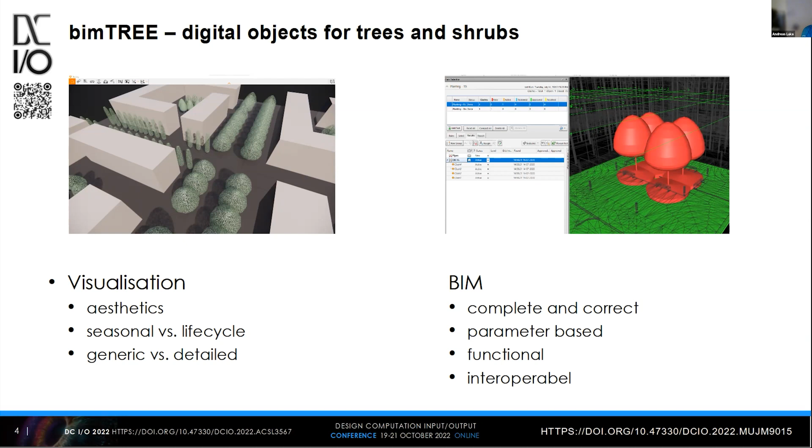And the trees are based on two general ideas that we put together. One is an asymmetric hull model developed by Cescatti for forest science, for measuring light in forest environments. With this kind of model he can represent, with only 8 parameters, 6 points and 2 form parameters, a huge variety of crown forms with a very small memory footprint, which makes it possible to have thousands of trees in one model.

And we could show that we could adapt this same model to roots. And the second one is finding formulas or models that can describe the growth of a tree or other plants over a whole life cycle. Many equations are very limited in their boundaries of when they are valid, like in the middle where we have this nice almost linear growth, but at the beginning and at the end, the growth is very different.

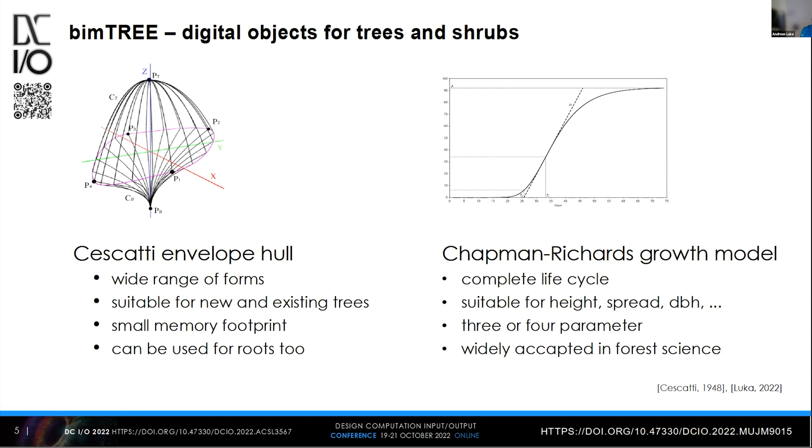And this model is also suitable for many different parameters of a tree. So we can simulate the development of diameter at breast height, of height, of spread of the tree, but also the height of the largest crown radius, all that is needed to describe a tree properly. And it's also very widely used in forest science for forest measurements and yield tables. So we have a lot of comparable data and good knowledge of how to solve this as a regression; it's a non-linear robust regression model that we use to find these growth parameters.

So we try to describe this tree with parameters that can also be compared to real existing trees. And we mostly do this in a very simple graphical way, drawing splines around the trees, and then we translate these splines into super ellipses because they are much more efficient to store and to manipulate than splines. And as we mentioned before, we fit the growth curve mostly with R, robust nonlinear regression, but it could be done in Python.

A couple of packages are available, and we're using a special reparameterization of these formulas. We have a very small, simple one for writing our code, and we have a reparameterization that is more comparable with data that we know from tree nurseries, like the point of strongest growth, that's the inflection point of the curve, or the maximum height of a tree, that's the asymptote of the curve, and so on. We have a special paper on this, and I also have a bigger blog on this topic on my website.

But you also have to see that these are empirical models. So often the best fitting curve is not the right curve. We found that sometimes curves don't start at the right point; diameter at breast height can't start at 0 because you only have breast height after 4 or 5 years of a tree. So a model that fits to 0 isn't correct. That's a problem we face with all empirical models, and people working in digital twins, where we go to lower order models, face actually the same problems.

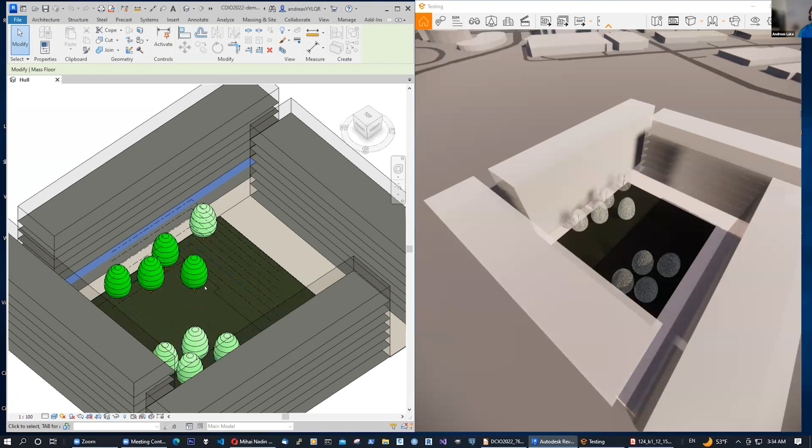I would like to give a very short demo by sharing this screen. I think you can see now on the left the BIM software, Revit, and on the right Enscape, and you see a first glimpse of the trees we use. So you can see in BIM they have a root system. These are very generic trees for urban design studies, with very simple textures for really large areas, small scale design. And they're not very exciting yet. The exciting part comes when we change them.

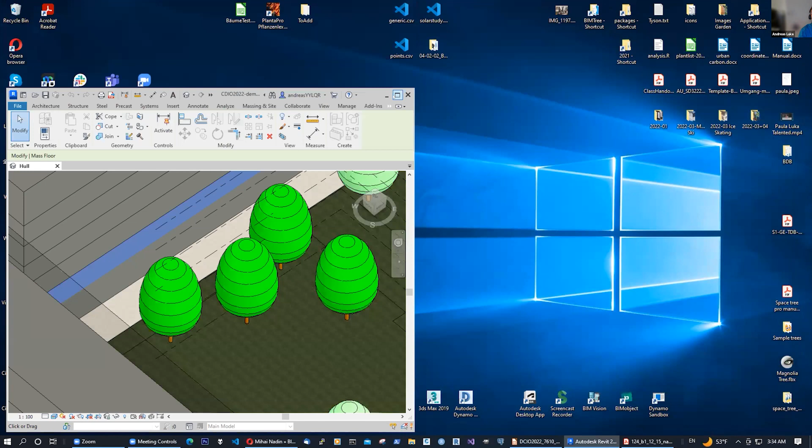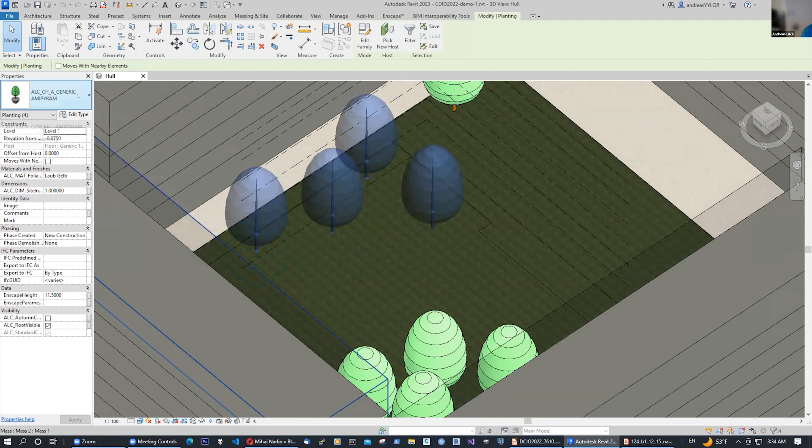I close Enscape for this one because it slows down the computer a little bit. So I want to open this one and get my properties back. This tree doesn't have growth yet. It's, as I say, a generic tree, but now we're exchanging this tree for a tree that really has these capabilities. So let's exchange this one for, let's say, a Tilia cordata Greenspire. And you see it's very small because that is the size at which it's delivered to the planting site.

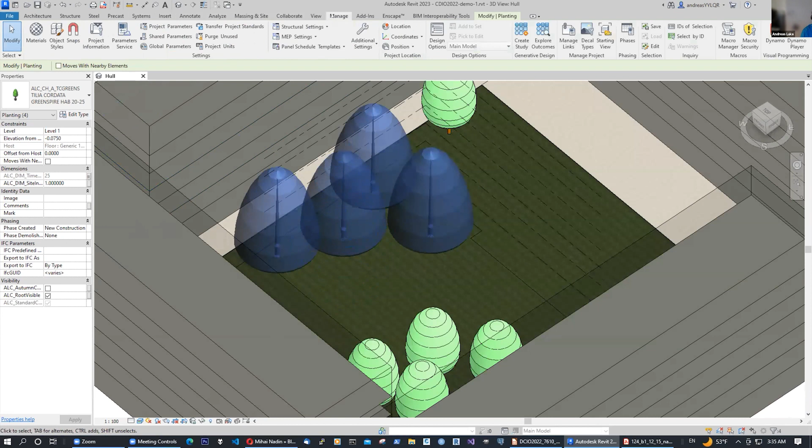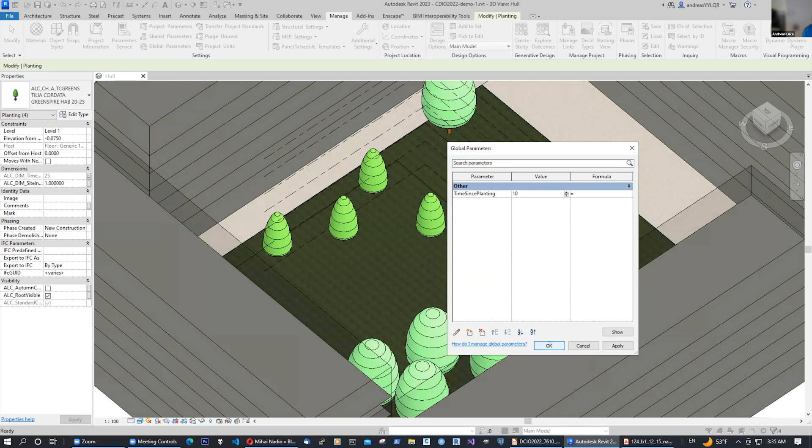And we are giving it the global parameter that gives us the age. By manipulating these global parameters, we can manipulate the tree size and its development very simply and efficiently. Let's move this over to this window. Let's say instead of 25 years after planting, I want to see this tree a little bit earlier. I want to see it 5 years after planting. 10 years, or whatever I want. And let's change this tree also.

Here we go. And let's load one to see how this is organized. So those are our Revit families, and those are the trees that are available for the students. And let's find, let's use an Acer campestre.

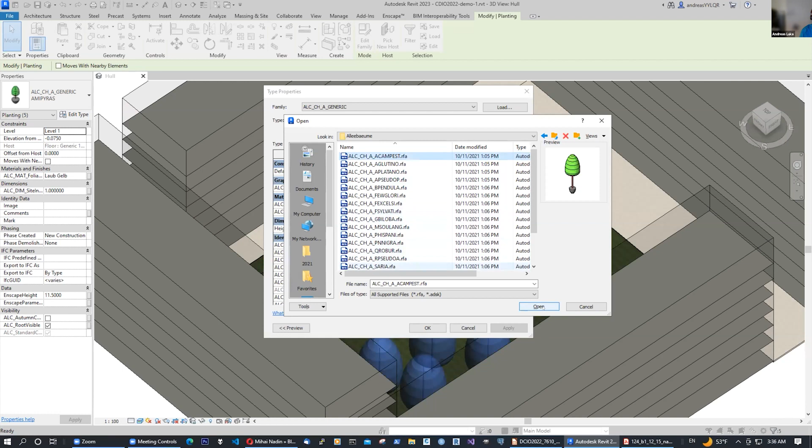And now we have the complete specifications from the Swiss tree nurseries. Whatever kind of tree you can buy in the tree nursery is in our database and can be accessed here. And they have start values, so we know at which size the tree is coming to the construction site. And from there, we're starting our growth equation.

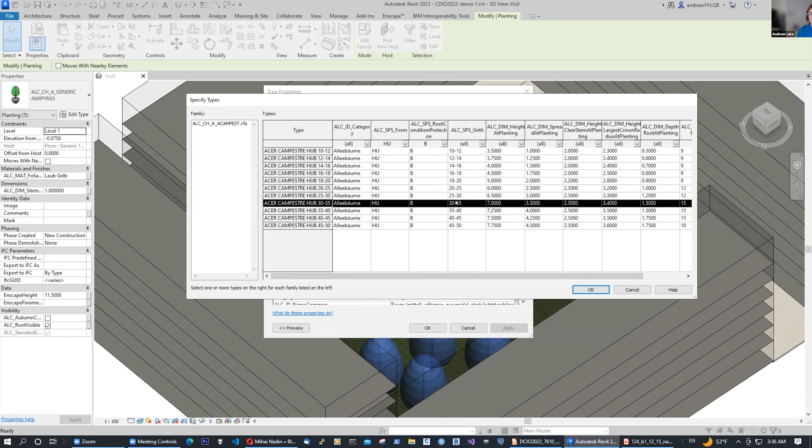Let's get a little bit bigger one. Let's get this, yeah, getting one with a root ball and getting quite a big girth. Okay, here we go. Okay, and we're giving this tree also the same time since planting like the other trees to adjust them simultaneously.

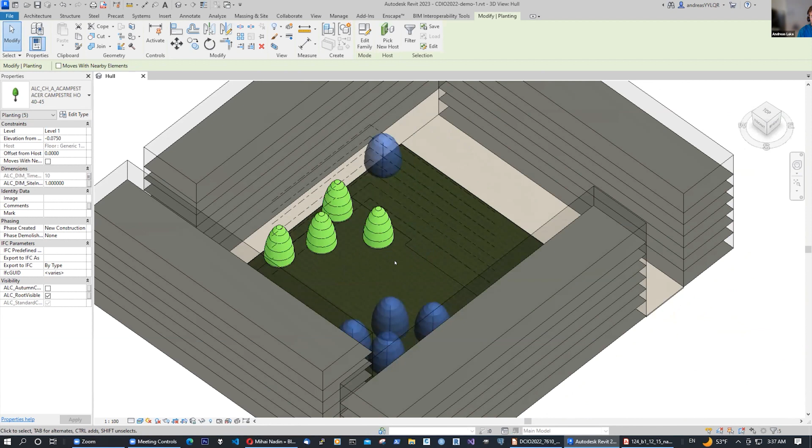So this helps us really in clash detection because they are actually solids. So we can use them in Navisworks or whatever software people are using for doing their BIM clash detection. And the growth is also related to the roots. So we see when the tree is getting bigger, the root system is getting bigger.

And we can find a couple of clashes that are normally not visible if I draw or model the tree only in one size. Mostly the standard is that we have a 25 to 30 years old tree in our drawings and models, but we can detect conflicts that are coming maybe much later because the tree is growing very big or the roots are going deeper and hitting the underground car park.

So we need to be aware how we're protecting the root system against damages when cables need to be repaired, or the other way around, how we're protecting building elements against aggressive root systems. That's how we started, and we are developing this now into a product.

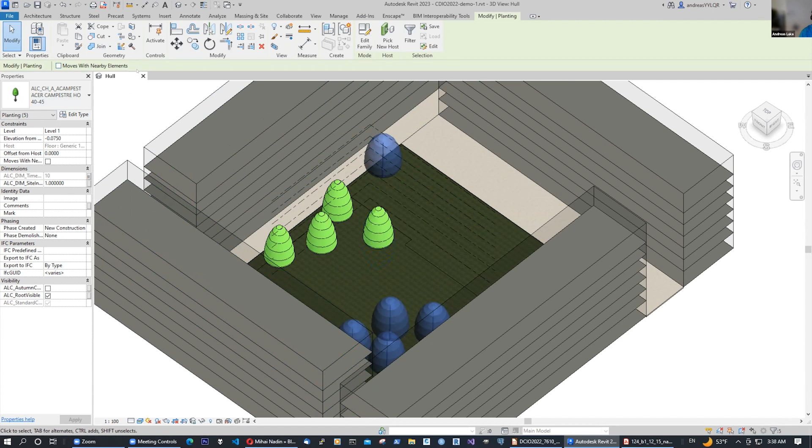But as you can see, there's a big empty space, and this also didn't show up in Enscape because it can't show up in Enscape because it's a point cloud. Let me quickly go to my view user interface and get my project browser on. So we can see over here, we have a LiDAR point cloud.

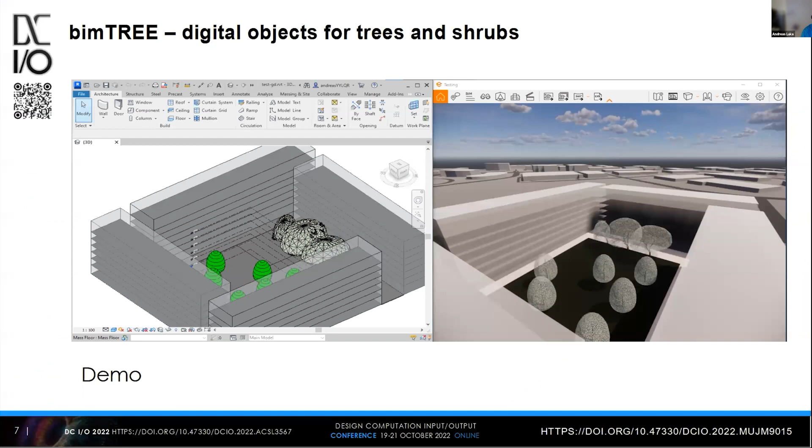And you already can see in this very simple BIM model that LiDAR point clouds have a fundamental problem. They are points, they are not solid objects, they are not meshes, they don't create shadow, they're very limited in analysis. So let me go back to the presentation to talk about this a little bit more. Start from current slide.

So what we are trying to achieve is changing this point cloud into solid models. That's our QSM, quantitative structure models. And you can see they're already casting shadow, but they're highly detailed and also bringing computational problems. They have very high computational costs, but they can be very well analyzed. We can trace back the development of the trees over years.

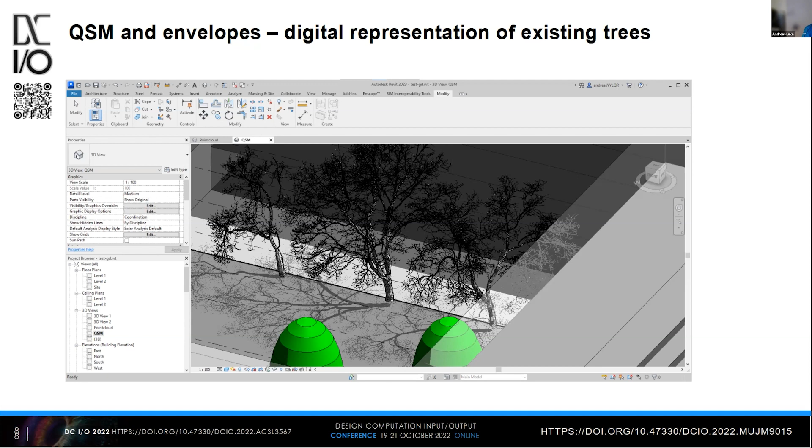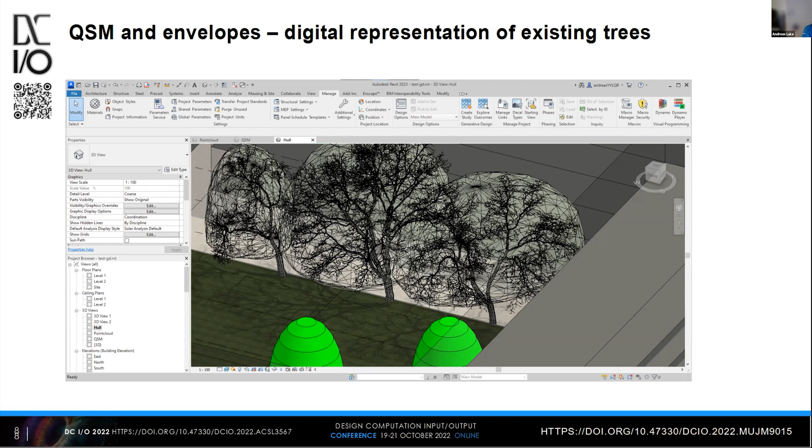The process is that we have a special software coming from forest science called CompuTree with a SimpleForest plugin, which are basically algorithms based on the Point Cloud Library for clustering points, after which we still have a lot of manual work to get noise and disturbance away, as very critical are lampposts that really disturb the algorithm. And I would like to show this in a small video. Let me go out of the presentation and start the video.

Andreas, just confirming we have a minute left or so now. Can you hear it? No, we cannot hear, but we can see it. Okay, then I'm talking to it.

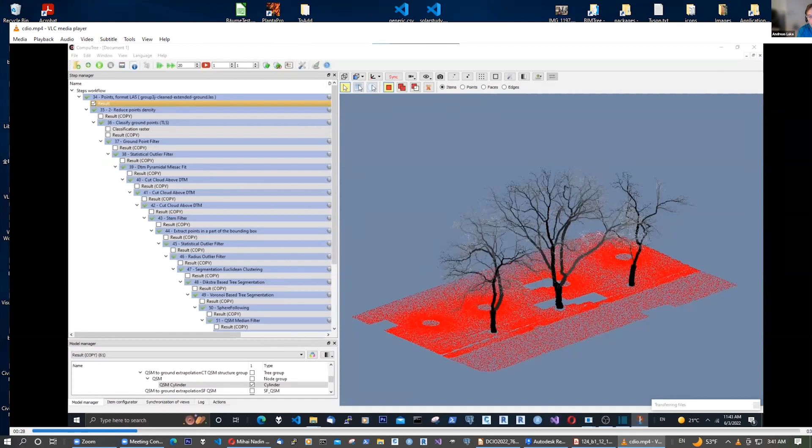So this is a small group of trees as derived from a terrestrial laser scan, and it's a bigger area. And we separate them in groups to process them faster. And there we need to start to clean them up, especially there are a lot of bicycles, persons, and especially lampposts. They are very critical.

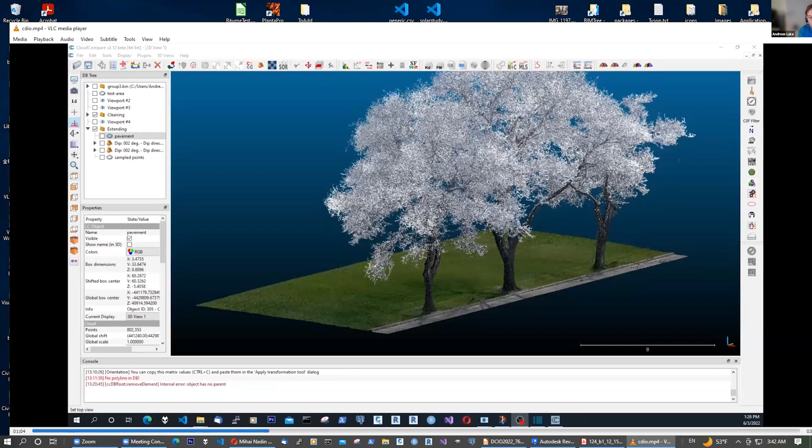And we have here a smaller problem. We don't have enough ground. A lot of algorithms are based on height to the ground for identifying special points. So we do the manual correction on it. So now the prepared point cloud is there.

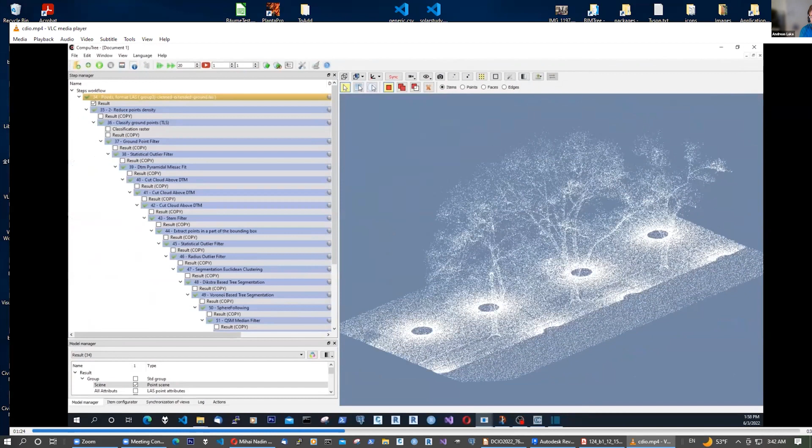And now we start the process chain on the left side. The first step is finding the ground points. The ground points are very simple: we make little squares out of this, we find the lowest point in each square, and then from there we start to find points that are very close to this level.

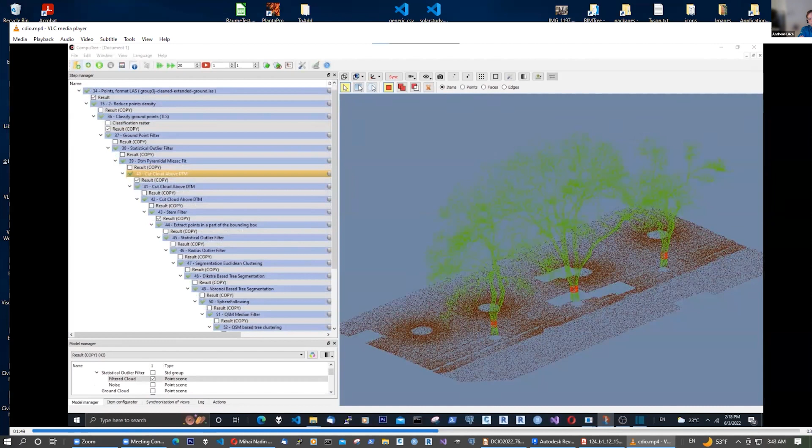We are also removing the collar of the trunk, because that's normally not a cylinder, and there we do special processing. Then we try to identify a very clear area where we know it definitely belongs to one of the trees. From there, we start grouping the trees, starting with a clustering algorithm based on Euclidean distance.

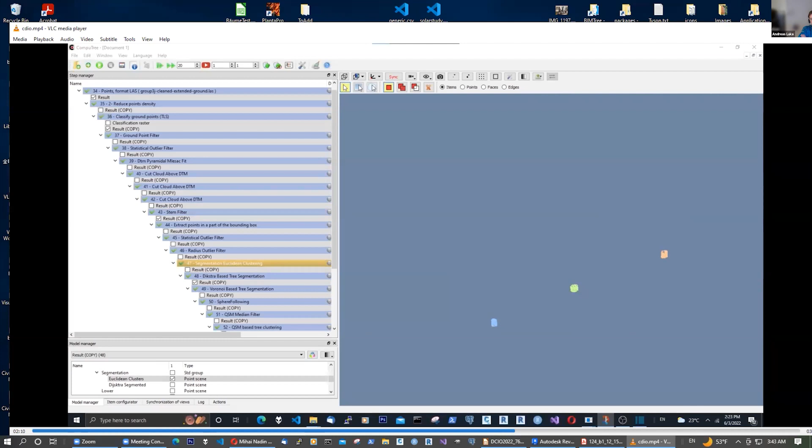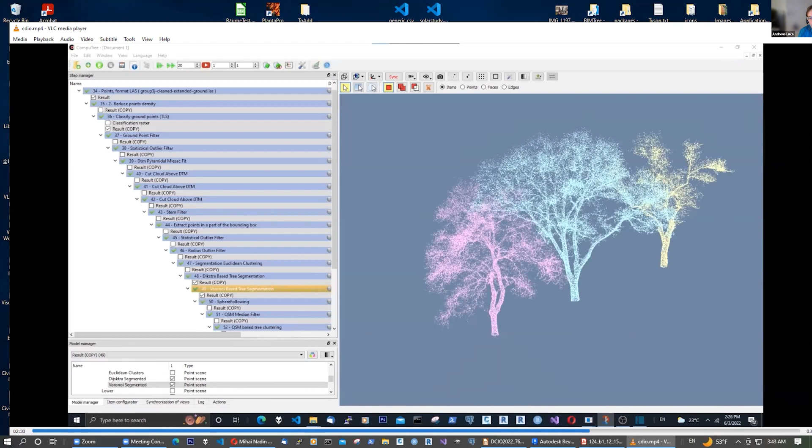And these cylinders are especially valuable for measuring and comparing trees. Then we use some more clustering algorithms. This one is now a Dijkstra clustering algorithm, and then comes a Voronoi clustering algorithm, and we can identify each tree.

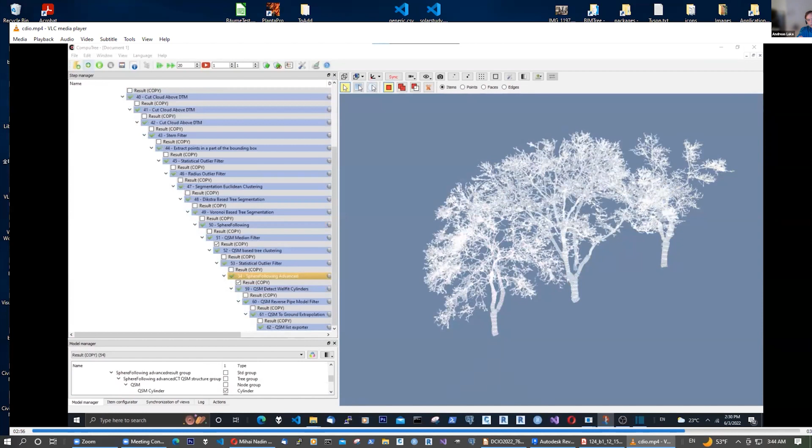And then comes a very costly computational task, fitting cylinders to these point clouds. But this gives us the opportunity to get volume out of it. There are a couple of corrections that happen during this process, based on biological knowledge, called the reverse pipe model. And at the end, we add the lowest point from the tree to the ground.

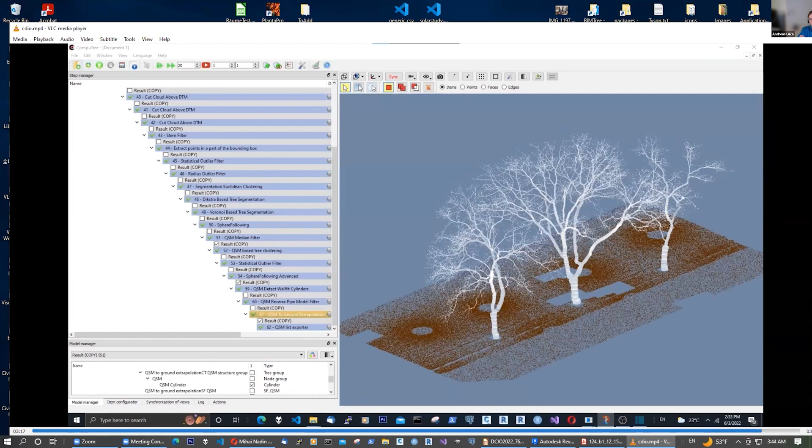In this case, we simply extend it. If we have special root collar systems, then we do this with a special fitting. And now we have a mesh, and now the video is finished. This mesh we process further in CAD. Let's go back to the presentation.

Andreas, just confirming we've run out of time, so you can conclude very briefly. Okay, I'll hurry up. Yeah.

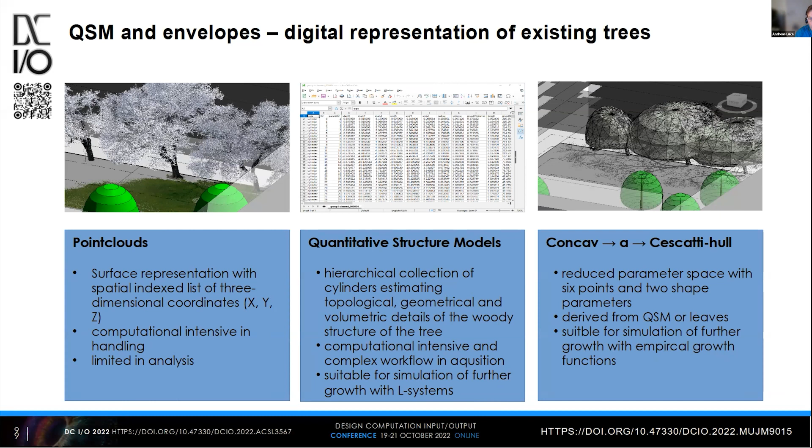So the quantitative structure model has one really big advantage, because there are numbers that can be analyzed very well. From the endpoints of the twigs, we can find a concave hull, an alpha hull, and from there we derive the Cescatti hull. This gives us the opportunity to go into things like digital twins and generative design. Both need lower-order models of trees to make them analyzable.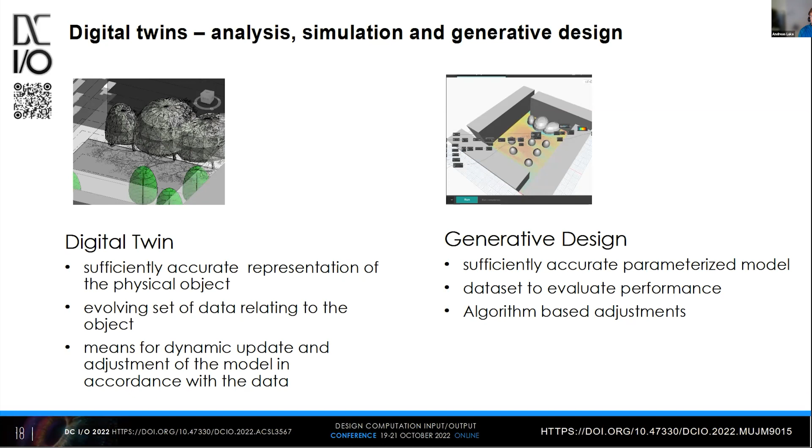So let's go quickly into this one, if we have time for this demo, or we just keep it to this picture. Here you can see solar analysis in Revit on the left side, and then tools in Revit's Dynamo programming environment. This then feeds into a generative design algorithm to find an optimum layout of trees compared to costs. So it's a two-factor analysis, optimizing with two different goals: cost minimizing and shadow maximizing.

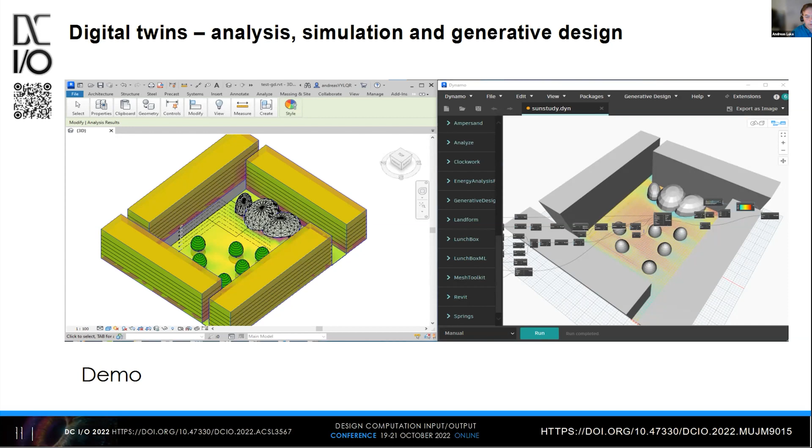We can have a short look into it if time allows. Unfortunately, Andreas, I'm really sorry, we won't have time, we're over 20 minutes. No problem. So if you have one conclusion slide, we can do that, otherwise we'll go into the discussion. Yes, I have a conclusion slide coming over here. So, slide.

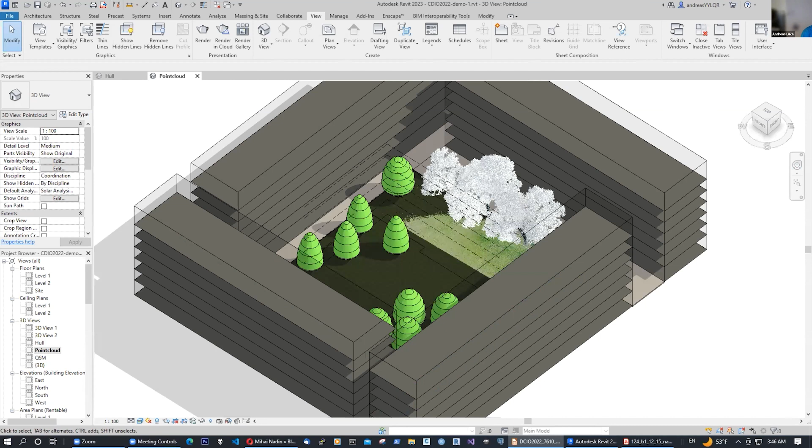So we are now able to build proper models as solids and meshes that can really be processed in software for design and analysis. That means that plants can become part of generative design tasks. With reduced model complexity, we have faster processing time and easier access to data. And with these models, we are also able to improve metrics for performance analysis, because we can measure woody volume and therefore carbon sequestration without cutting trees down.

But we still have a lot of gaps in our process chain. We still need a lot of manual tasks that interrupt these workflows, we still lack tools for integrating this into our day-to-day process, and especially we lack generalized models for designing. So it's still a very time-consuming task to develop individual models for each design task. That would be the end.